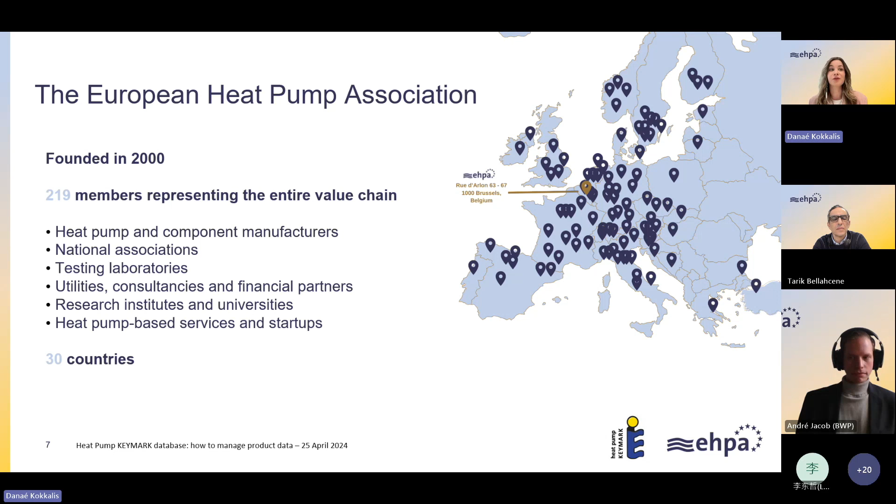We have manufacturers for heat pumps, but also components, national associations, testing laboratories, utilities, consultancies, research institutes and universities, and heat pump-based services and startups. So all of these together are spread across 30 countries in Europe. We have a very diverse association, and we also have a few departments.

As an association, our mission is to help the heat pump sector develop to its full potential and make heat pump technology the number one heating and cooling technology in Europe. The policy department is helping a lot with that because they are the intermediate between the people in the sector who express their needs, and then the policy department pushes that and communicates it to the institutions.

Here is the Heat Pump KEYMARK. So this is where we stand. We are managing the Secretariat as EHPA, but the scheme itself is owned by CEN and CENELEC, which is the European Committee for Standardization.

And as a Secretariat, we manage meetings. We participate in a lot of trade shows, in-person events, and also webinars like the one you are attending right now. And we also do some promotion both online and in real life. We also have some European funded projects that we're managing.

These are only some of them. We have a lot more. And we also have other departments that are not depicted here, but are still important, like the communications department and the events and membership one. So if you would like to know more about what EHPA does, you can go to our website, ehpa.org, to learn more.

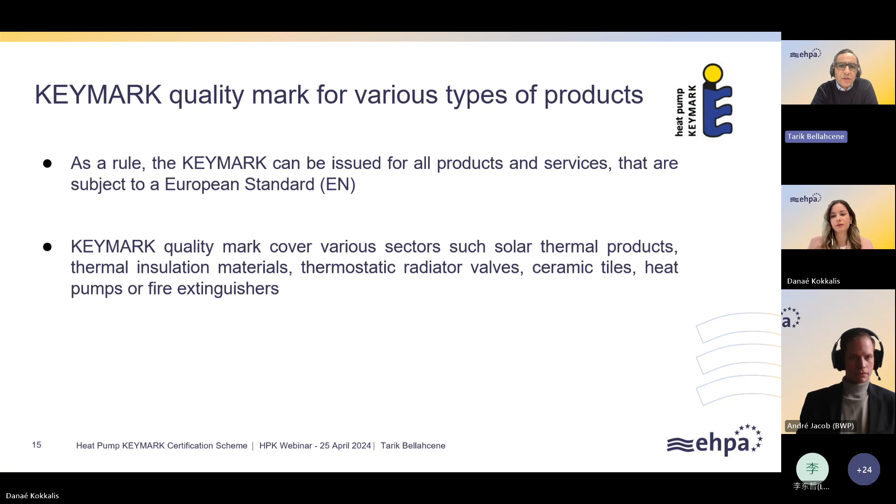You can see here the main, let's say, alive KEYMARK certifications. Thermal insulation is one of the most advanced and mature, with almost 2,500 certificates, followed now closer and closer by the Heat Pump KEYMARK. Today, Heat Pump KEYMARK certificates represent 37% of the total KEYMARK certificates issued in total. Then you have solar thermal, thermostatic radiators, and thermal insulation. So we see that KEYMARK heat pump is quite solid and still growing, one of the most respected KEYMARK certifications. It's a good sign, it's positive.

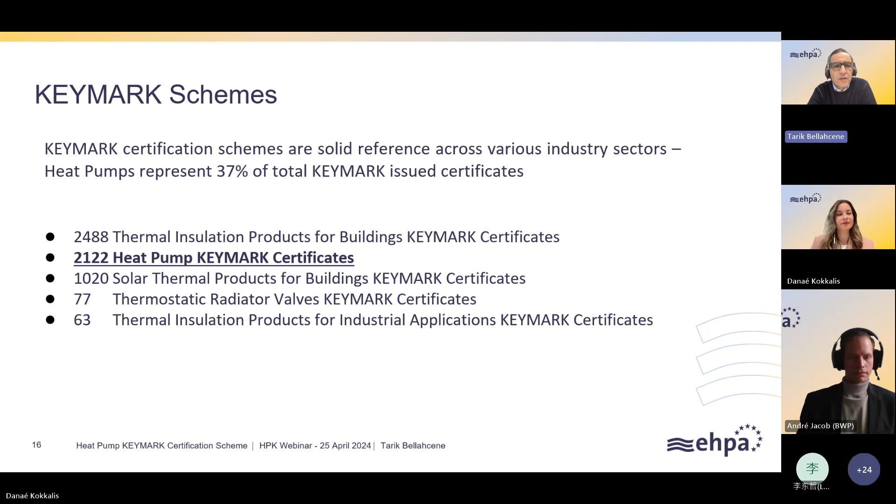Now, if we focus - since there are different KEYMARK schemes - as the European Heat Pump Association, our focus is on heat pumps, and the scope covers different types of electrical driven heat pumps. This is a short summary of the scope: space heating and cooling heat pumps, domestic hot water, and combination heater heat pumps. The technologies we cover in the KEYMARK certification are air to water, brine to water, and air to air. You have more details in the Heat Pump KEYMARK rules version 14, which is publicly available online.

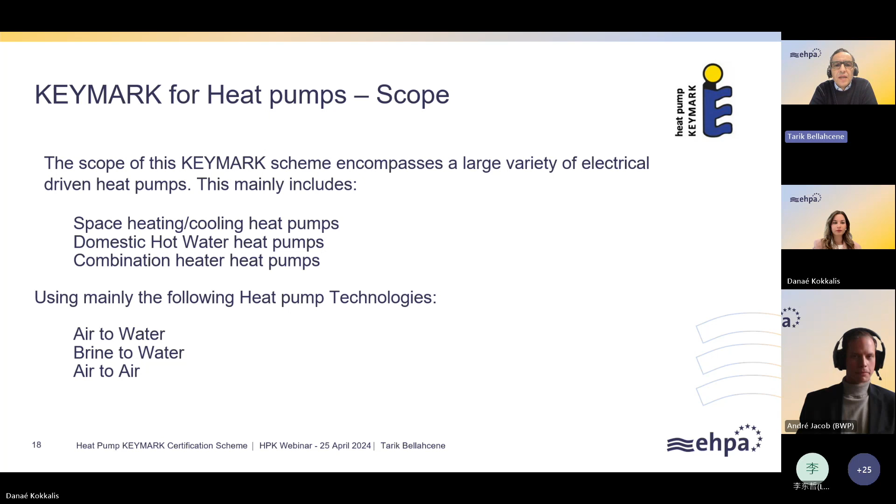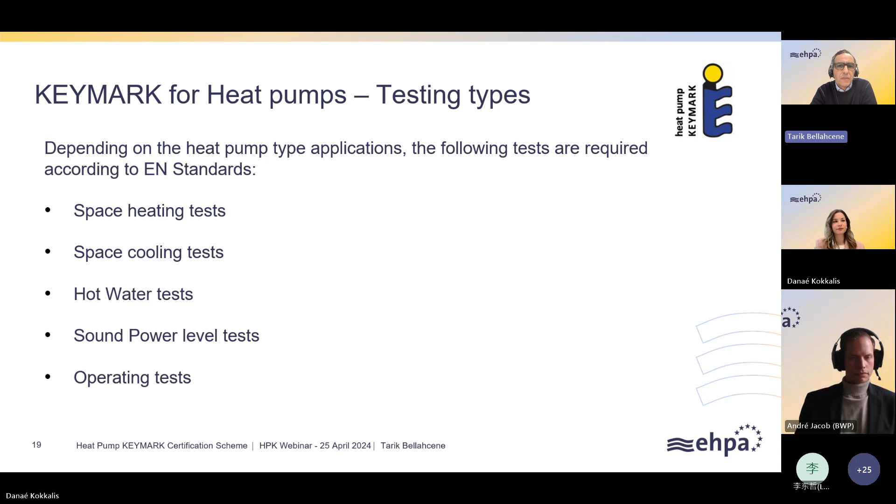Now, again very briefly, to give an idea of what we cover in terms of testing: it's important to understand that the Heat Pump KEYMARK is a certification that challenges a device from the performance point of view, not the safety point of view. So we challenge the product under different conditions: the space heating or space cooling test, the hot water test when there is a hot water option, and we look at sound power and some operating tests. So it's really about the performance, the functioning of the heat pump, not necessarily the safety, electrical, or other safety-related checks. This is not KEYMARK - that can be in a CE context or other certification schemes. Here, KEYMARK is about the performance of the equipment.

So to do this test that I mentioned, but summarized as much as I can, we need to refer to European standards, and these are the main European standards. I'm sure you recognize them, probably better than me, that we refer to in the scheme to do the testing. These standards describe the test setup, test requirements, and all details related to the testing. You can see they are all European tests and standards.

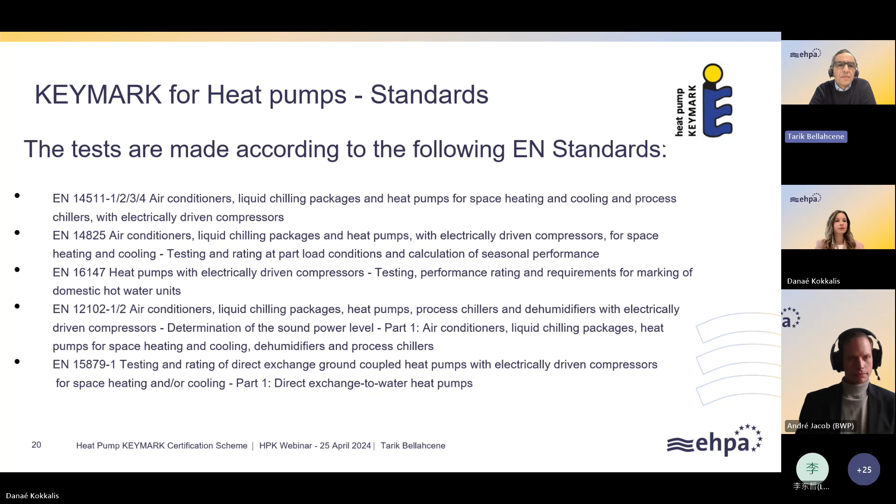Now we looked at the standards, we looked at what we test. We know there's a third-party certification body, but then who is managing, who is making this scheme work and stay alive? So we have a clear and open structure where you have the heat pump scheme group. The scheme group mainly consists of the certificate holders, the laboratories, the certification body, the inspectors, and the EHPA.

You have a steering committee who is really developing the rules, looking at maintaining quality documents to make the KEYMARK scheme robust and to sustain the quality of the scheme.

So the steering committee has a lot of work in terms of technical aspects, but also the quality aspect of the scheme. The steering committee presents to the scheme group all the modifications, the rules, or the development of the scheme. So any development made by the steering committee still needs the approval of the scheme group to be adopted as a rule, or any modification or development.

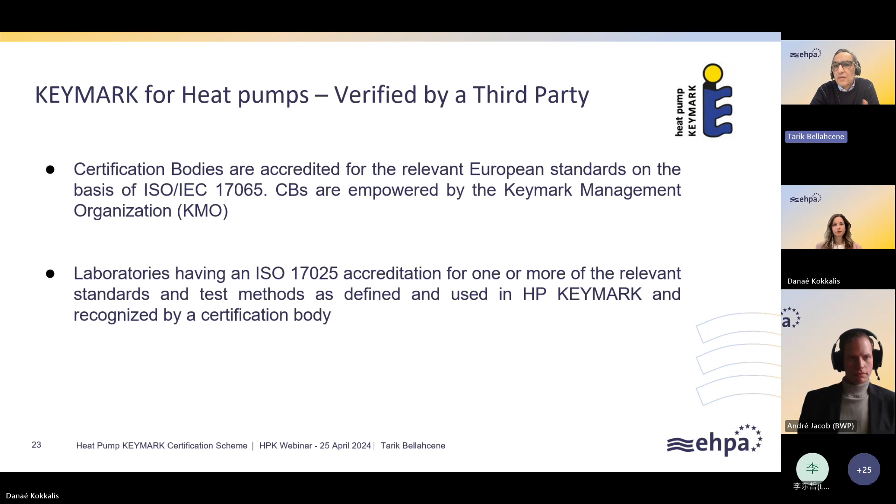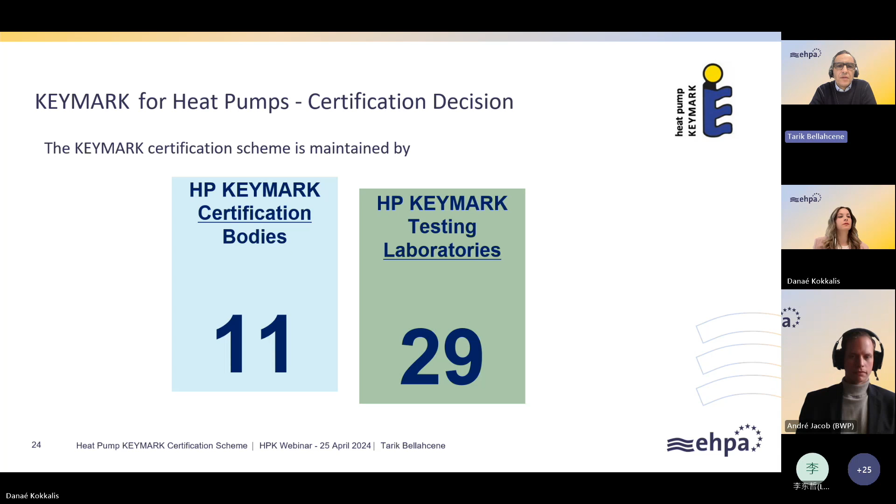So today I said that KEYMARK is empowering certification bodies. We have 11 of them that are delivering the certification, and they take what we call the final certification decision. These 11 certification bodies recognized 29 laboratories across the globe. You can see them in the slides showing the certification bodies and the laboratories. You will receive this slide, so if you want to look in detail who is who, you can have a look at these slides.

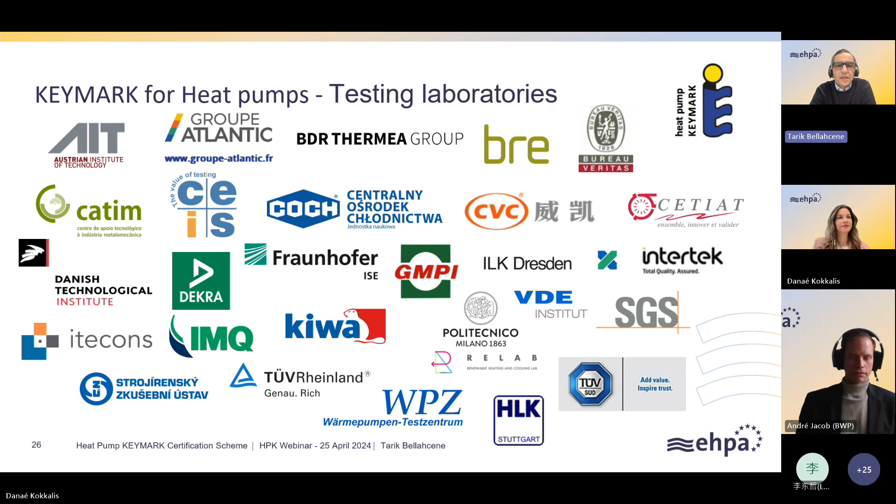As a result of this setup, this organization, this scheme, all these efforts from the CBs, certification bodies, and the laboratories, we have a fast growth in terms of development of the scheme. Today we have 141 certificate holders holding 2,122 certificates, and this covers more than 8,000 certified models, which is huge, which is very big.

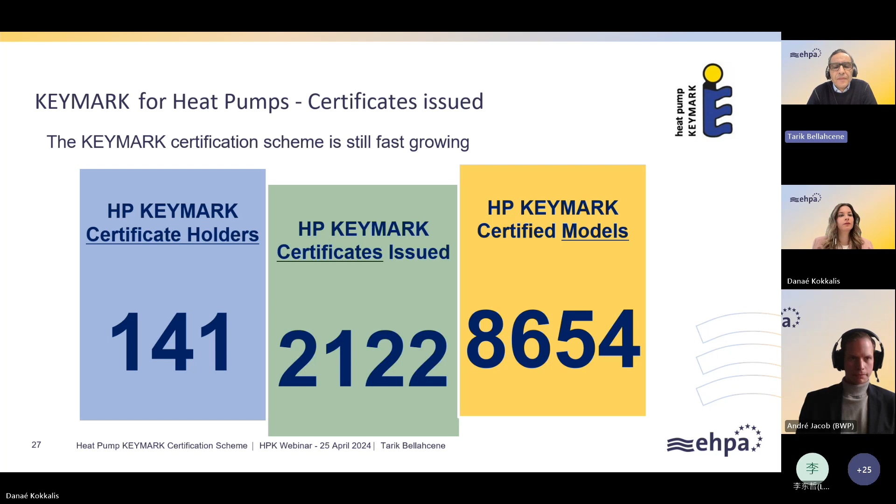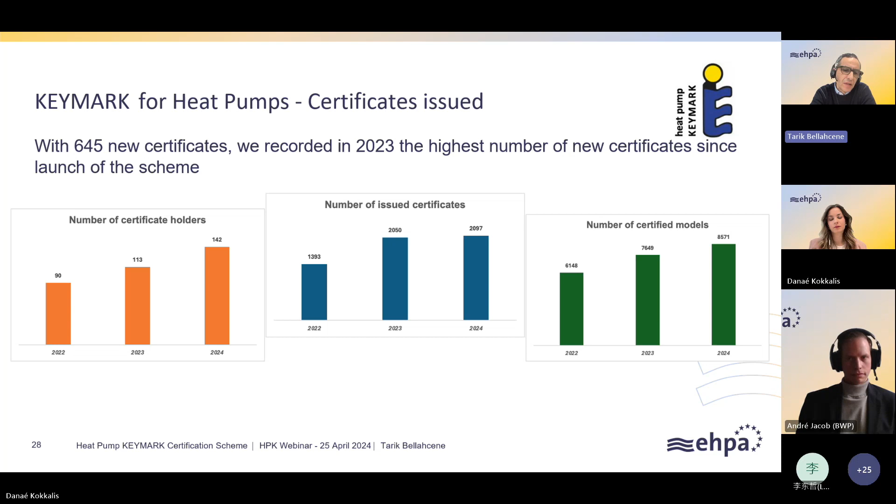You will see in my next slide how this is evolving year after year. Just comparing 2022 and 2023, you see that the number of certified models or certificates is increasing very fast from one year to another. Just to give you a number, in 2023 alone we had 645 new certificates, which is extremely high. Usually the annual average is between 150 and 200, and here we're talking about more than 600. So the interest in the Heat Pump KEYMARK doesn't need to be demonstrated, it's obvious looking at these numbers. The main reason is the third-party certification, the European certification.

Now we can talk about the certification process. It's a classical one, where we have an application step. The manufacturer or distributor will contact one of the certification bodies of their choice, close to their country, or one they're used to working with, or one implemented within their country of activities. From there we have a clear review with the manufacturer. Together they work on the family of products to be certified, to understand the manufacturer's needs, and to come up with a family of products and a testing plan. Then the manufacturer can look at a laboratory that is designated, empowered, and recognized by the certification body.

Then we can start looking at the auditing, the inspection part, and the sample collections, and start the testing as well. All this can start at the same time, and the certification body will collect the inspection report and the test reports, do a review of these two reports, and come to a certification decision by issuing a certification for the product. This is how it works.

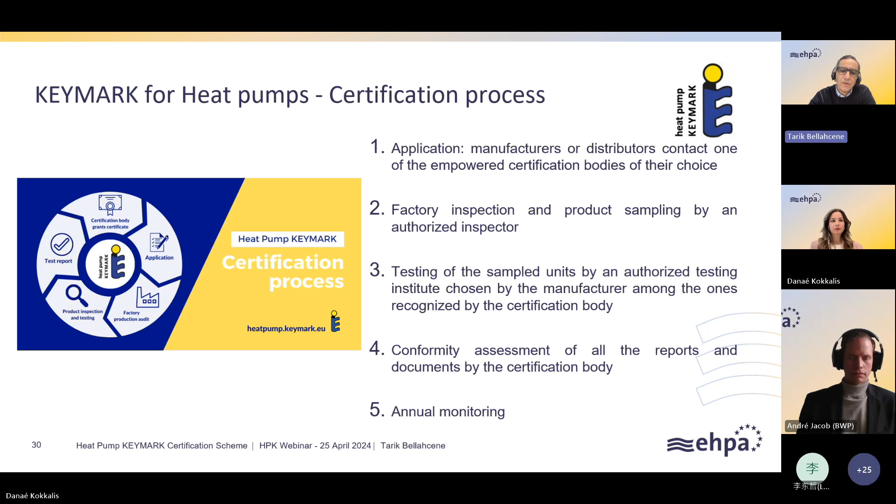Yeah, I will. The database - Andre will speak about it in detail. Just to say that there is a database used by the manufacturer, the certification body, and there is public access to some part of it that is interesting for the public and a consumer, an installer, or even a regulator. So this is something that will be covered today. That is the main topic of today, by the way.

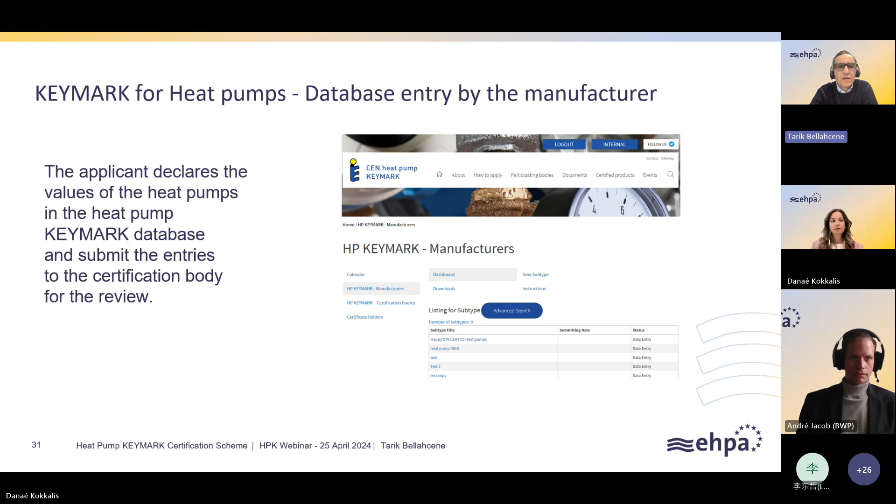I just want to talk about recognition because we keep on talking about recognition, and I wanted to put some slides because just to say that we are not trying to avoid any comment, any discussion, any question about recognition. I have 2 slides about recognition.

These are for sure. We know that if you have Heat Pump KEYMARK certification, you can de facto immediately, without any additional testing or additional paperwork, register your product for the UK, so the MCS database. So this is something that is obvious, but again, it is important. You need to go through your certification body that will contact the Heat Pump KEYMARK Secretariat - it's me - and we can upload the specific format to populate the MCS database, and then your products are there listed for the UK market.

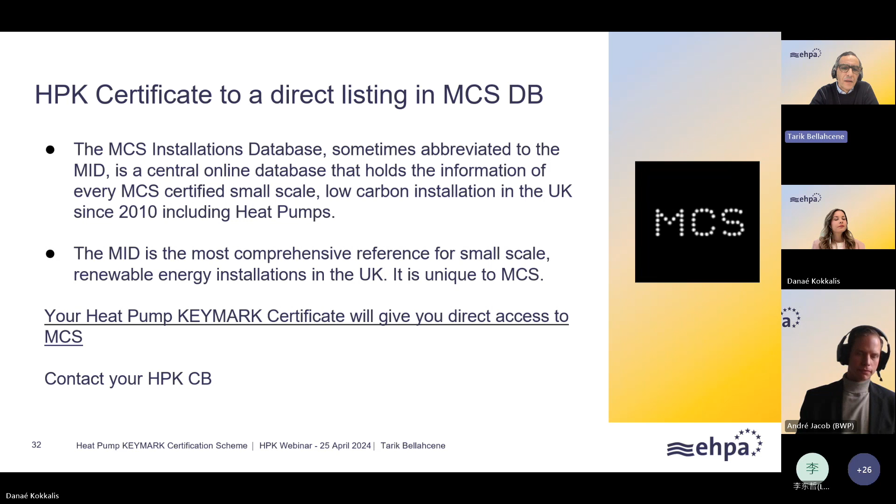Ready to be referred to for any subsidies or any other plan. The second one is the quality label. So the quality label also, there is a lot of discussions, and you can't imagine all what we are discussing to keep aligned the quality label with the KEYMARK.

These discussions are still ongoing, but this is clear that with your Heat Pump KEYMARK certificate and the test report, if there is any test report, you can have access to the quality label, and you need to contact, it's by country. So if you want to go to the Austrian market, you need to go to the quality label national commission in Austria and apply, and then and so on and so on. But you can definitely refer to a Heat Pump KEYMARK certificate.

Again, although you heard maybe something different because of the misalignment that we had with the quality label, but now we are back on track, hopefully, and we are clarifying some valid points made by the national commissions about the test reports, about the format, about a lot of things. But the concept is clearly confirmed by both parts, that they recognize the scheme, the way we are organizing the subtypes, the way we are testing, the way we are managing the Heat Pump KEYMARK scheme.

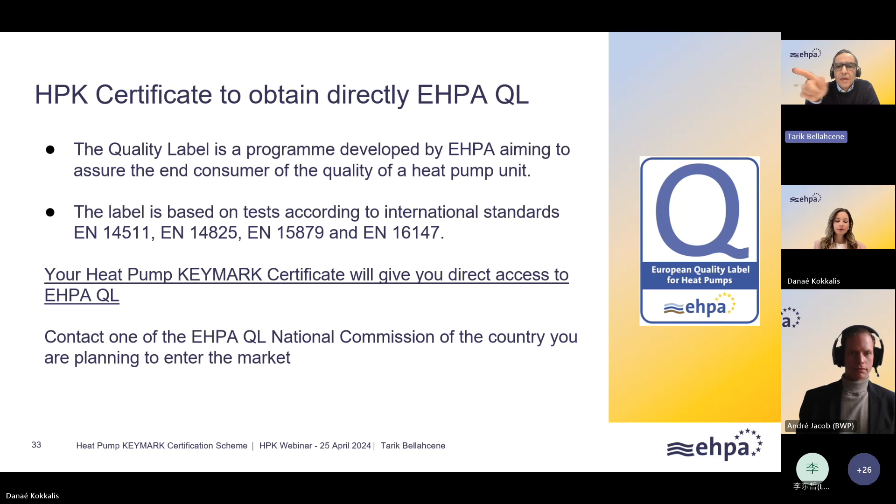So we have some points that needed clarification and discussions, and some are still discussed, but you should not have any problem transiting from KEYMARK to obtain the quality label.

So yeah, for this, in the past, we had a nice map here of Europe, but this is very complicated to show a map, because from a country to another one, the situation is very, very different, not complex, but different. So you have different possibilities depending on which country you are.

If the country is regulated, and they can refer to heat pump KEYMARK, like France - they are regulated, they refer to heat pump KEYMARK, so you can use your heat pump KEYMARK certification to follow the process and get into the French market.

This is an example. But there are some countries, let's take Italy or Spain, where there is no specific regulation. There is nothing that is mandatory or enforced within the country. So what we can say is that KEYMARK is not recognized. It's not that it is not recognized - it is not needed today.

But if there is a scheme, there is an example in Czech Republic where they are working on subsidy schemes - they start to look at KEYMARK, because that may be a reference to their subsidy scheme. But if you go to, again, Italy and Spain, where maybe there is no specific plan to have a subsidy scheme, and there is no plan to enforce a regulation, or it is coming, we don't know, then the KEYMARK is optional. As simple as that.

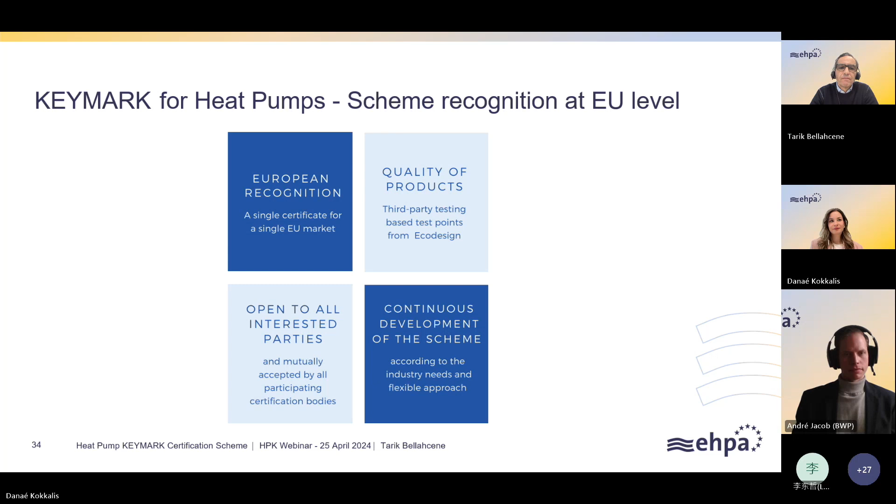I think the next slides are about the database. This is in the context of giving public access to information. There is a dedicated website where you can find all the information, and André will touch part of this as well in his explanations. Then you have access to the listings of the certified companies. I guess you are all familiar with this.

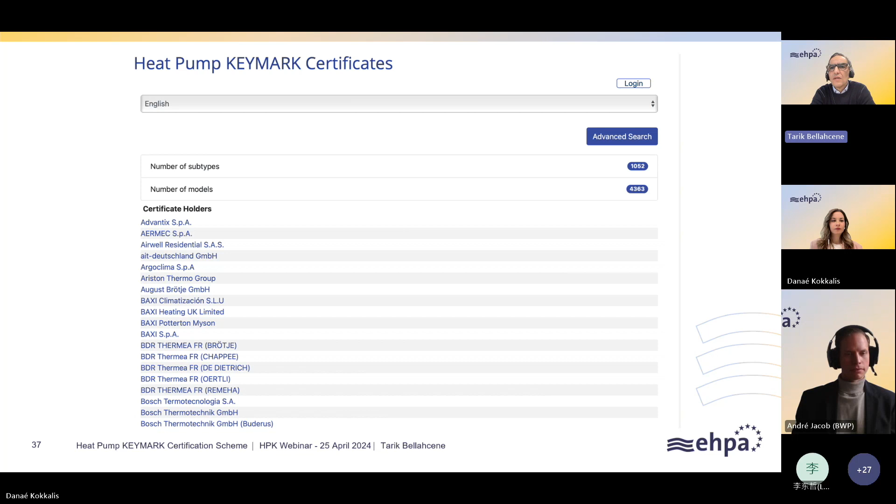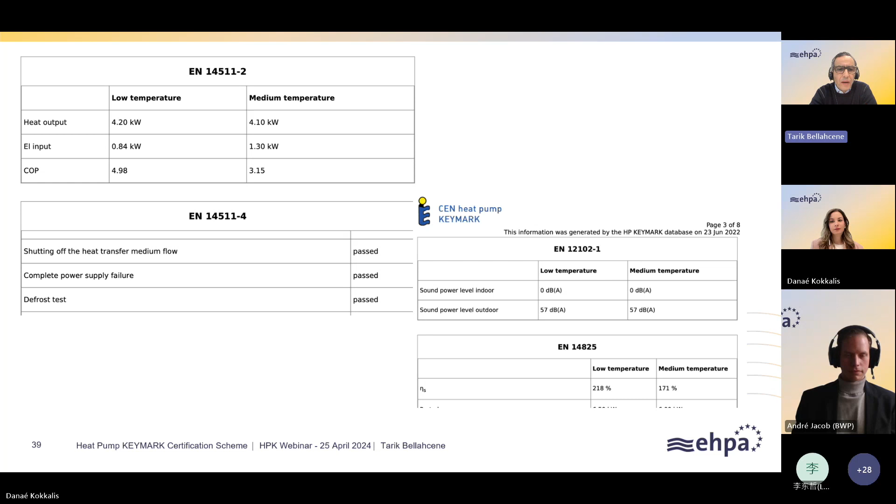And then you can click on the company, and then you can start to go more in depth to understand what is certified according to which standard, what are the technical parameters of the equipment, and what are the test results that are summarized. I think now we have multilingual access to this database, and at least we are working on this. But I know that André and Danae did a very good job on giving access to the public, but also in other languages than English.

And again, the transparency of the scheme. So we invite all the certificate holders, laboratories, inspectors, certification bodies to participate, and this is definitely a real invitation to support this certification scheme. Thank you for listening to me. Maybe you will have questions later, or yeah, okay, good.

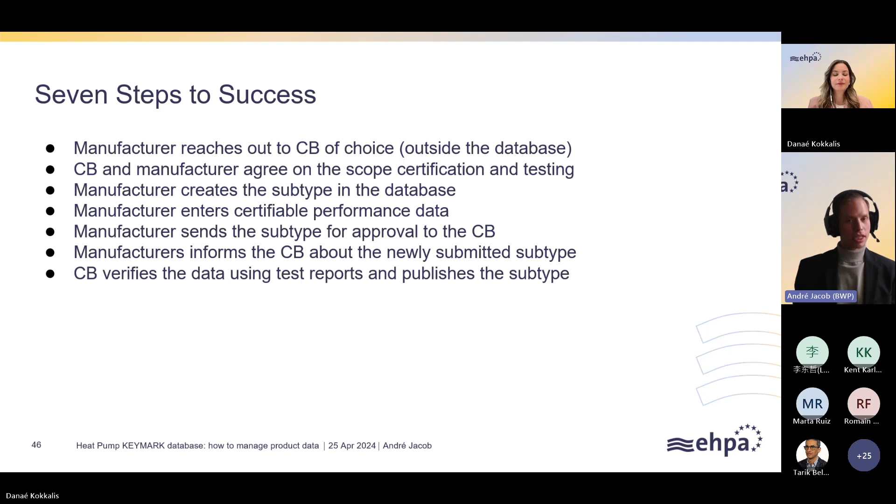And now we will cover all of these steps in detail to see what is to be done within the database. So this is how to get the engine running, as different groups. As a manufacturer, you would reach out to an empowered certification body to say that you're interested in the scheme, as said before.

The Heat Pump KEYMARK Secretariat will be notified about your interest in the scheme and add the manufacturer's company to the database, or you might also reach out to the Secretariat directly, but it is advised to go the route through the certification body.

Then a user account will be created for you, and you will receive a request to reset your password, which is needed prior to your first login.

As a certification body, you would need to send an application form to the KMO, as said before, as the organization supervising all KEYMARK schemes. And as a testing laboratory, you would establish contact to one of the certification bodies, or even more if you want to, and you should pay attention to the requirements that are laid out in Annex H of the KEYMARK scheme rules.

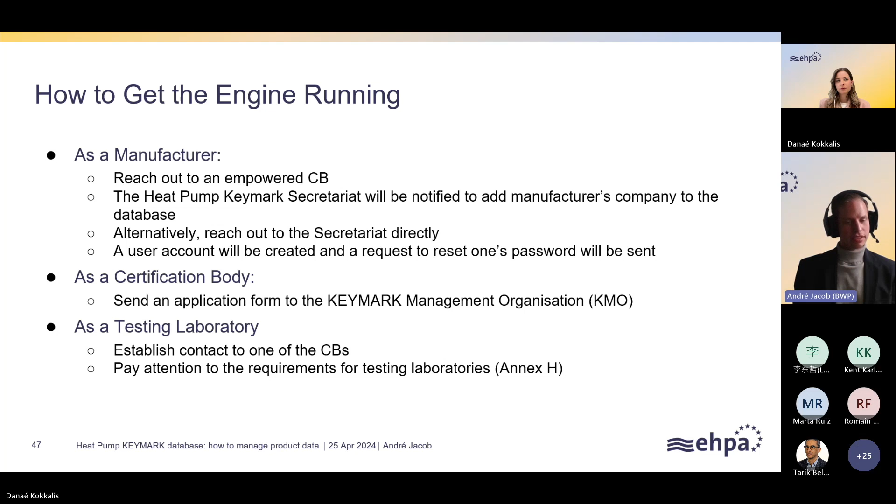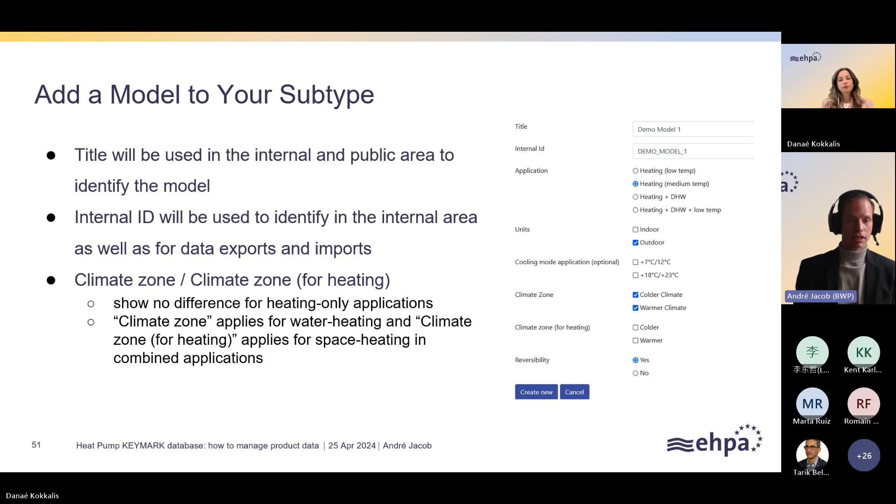For medium temperature heat pumps heating only, there would be data for low temperature and medium temperature, for example for the standards 14511 and 14825. If you have a low temperature heat pump, only low temperature data fields would be added to this dynamic data sheet. And then to fill out the data and get rid of the NAs, you have two methods: manual input and data import, which we will both cover shortly.

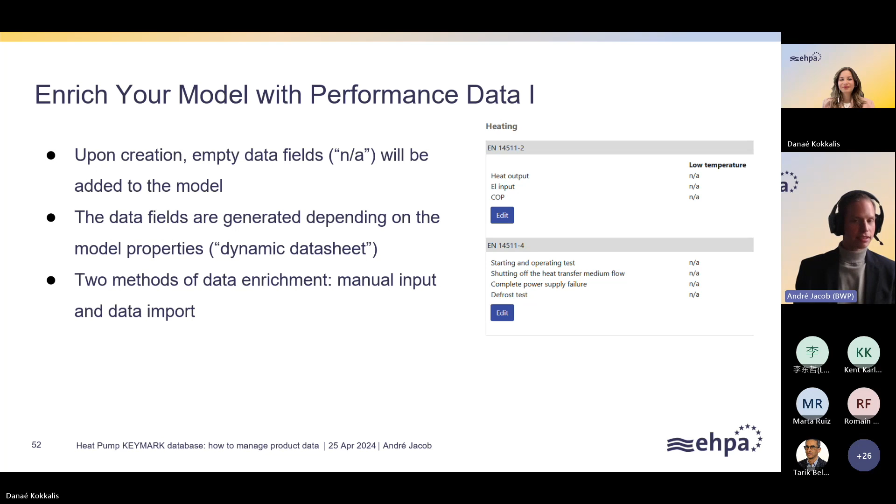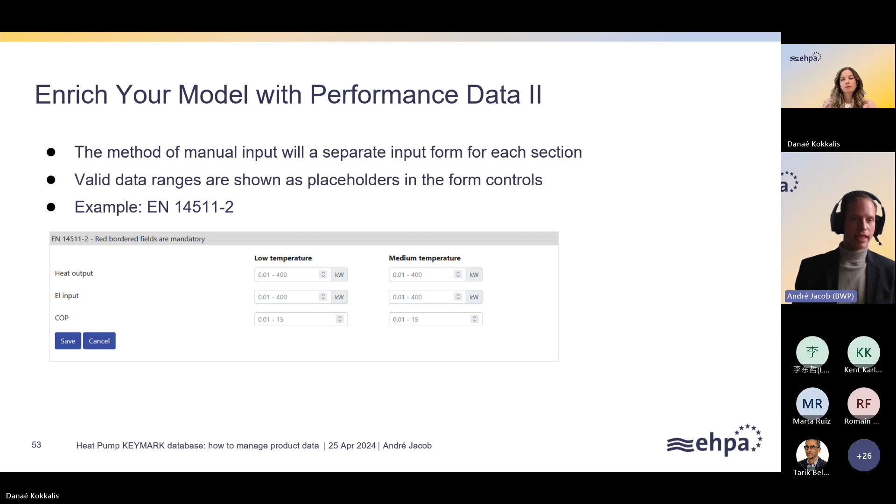Next slide please. So this is the manual input of data. As you can see, there is the valid data range shown in the input fields, as well as the unit next to it. And then there are the required fields highlighted in red. This should be true on each and every field in the database that is required. This is here the example for 14511 part 2 and for medium temperature heat pumps. So you could enter this data manually and click on save, and then there wouldn't be these NAs anymore, but the data you've just entered.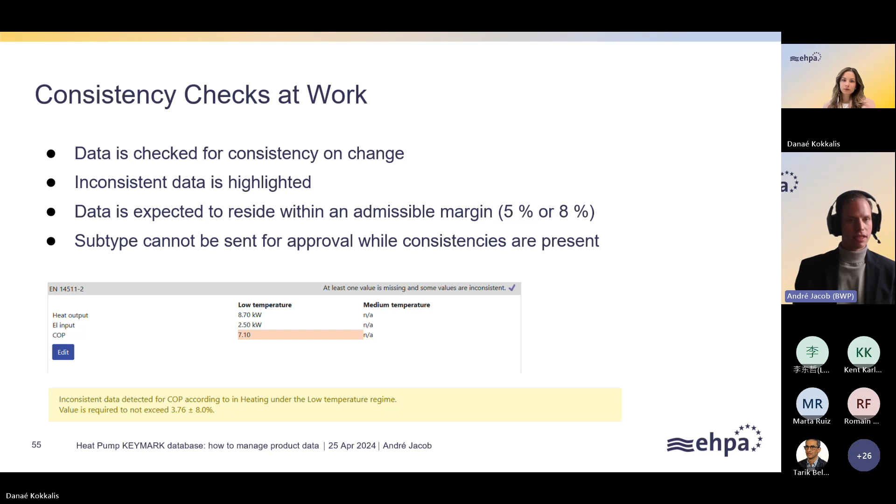Next slide please. And this is what the certification body sees on their side. They have an overview similar to the manufacturer's, and also a detailed subtype view with all the data in short. They would change the subtype's status to either data entry, to send it back to the manufacturer - for example, if there is data that might be consistent all along the subtype, because otherwise you wouldn't be able to submit it in the first place, but it might not correspond to the test reports also sent over. Then they would change the subtype back to data entry, so you as a manufacturer would have the chance to change data again.

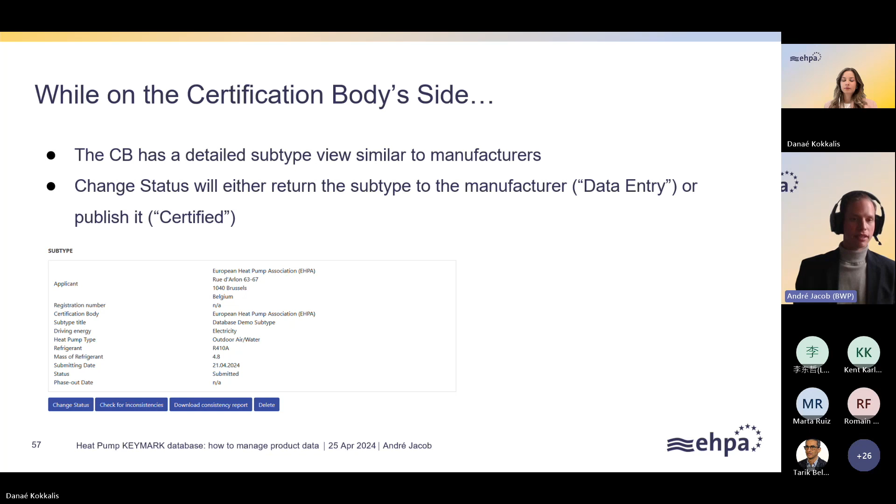Or if all the data is fine and corresponds with the test reports, the certification body would change its status to certified, and the subtype would be visible in the public area of the database. Next slide, please.

Also, the certification body would change or add data to the subtype that's only known to them, especially the registration number, as well as a PDF of their certificate prior to publication, so that interested parties can search for the registration number and download the PDF file for further use if needed. Also to cross-check the PDF they might have received a different way, for example via email from another party using this KEYMARK certification, to check if it corresponds to the PDF file that is in the database.

Next slide, please. And this should be everything from my side. As I said before, we will go through all these steps after the break, and then we will see how this works in action.

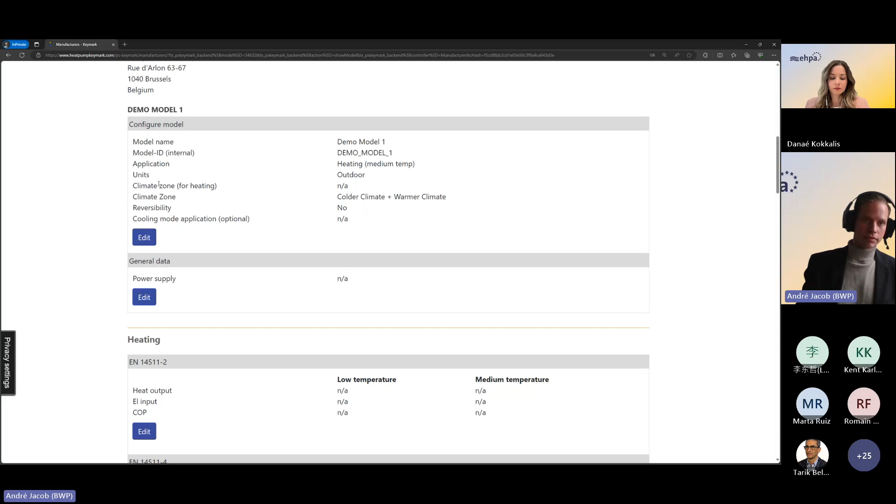So then we would create the new model. And this is the detail view. You can see the general data on the subtype, on the model - this is basically all the information you've added before, and then it'd be broken down by the application.

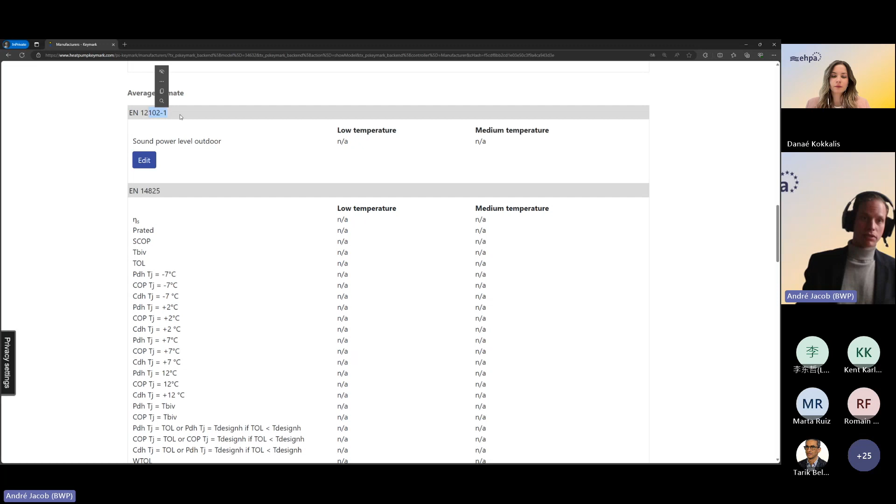So this is heating, then you have the standard, and then the information, performance data related to that standard. Then this goes on and on. Then you have the average climate, also heating. This is then the sound data, or sound power level according to eco design.

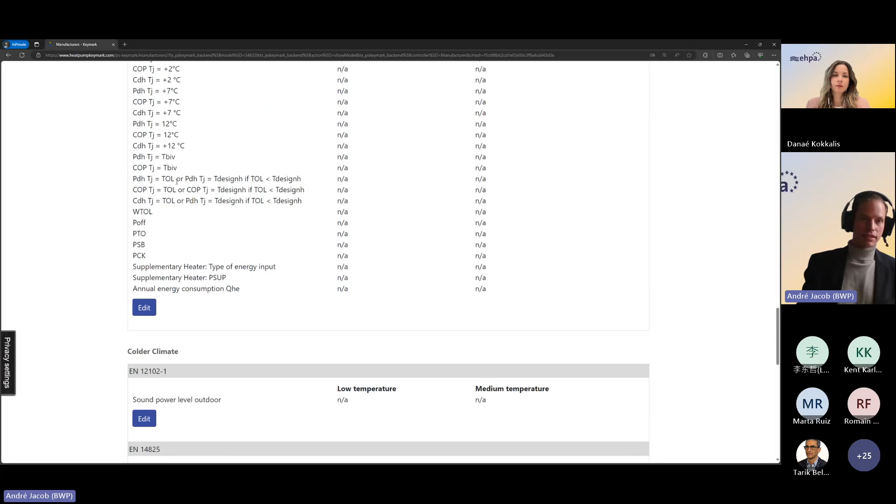Then this is 14825 data all along the way, and then you'd see the next climate zone, because you click that you'd cover warmer climate and colder climate, and that is it.

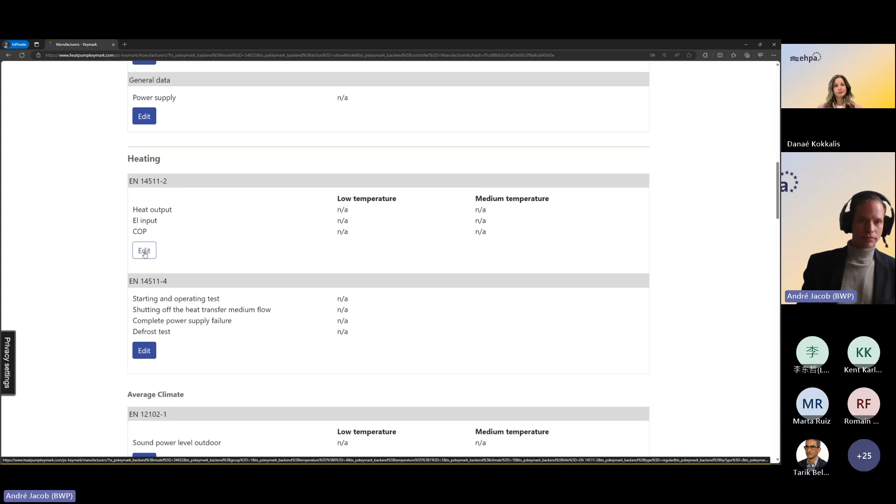So, at this point already, I'd like to break a little bit apart from the slides where it showed the inconsistencies later, and do it now by adding data here.

So this is my heat output. This is my electrical input. We have a simple example here. And then as well, we have, let's say 10, but we say that the COP would be 6.

So that's definitely wrong. We save the information, and this is the warning that you'd receive when adding data that is not correct or inconsistent with other data found in the model. This is also highlighted, and you will receive a message here. There are no NAs in this section, but there is an inconsistency.

So in order to sort it out, I click on edit. I say this is 5 rather than 6, save, and now this is all good.

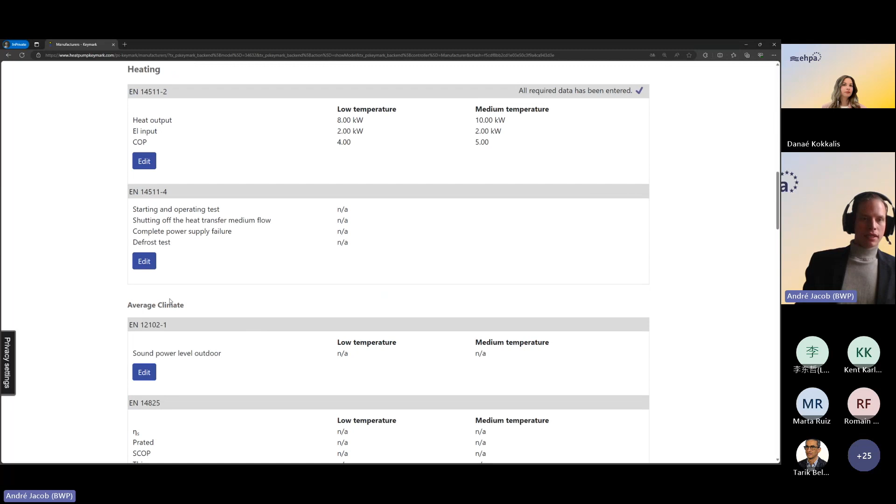I've now done this already and entered the data. So we will not go through the pain of doing this all together, which is also a little bit time consuming doing it for the first time.

This is why I go to the bottom of this detail view on the model, click on back to get back to the subtype. Here I click on import model, then I will select the file and click on import CSV.

This has been all prepared before. Then this would go through. I get a message of success down here. Click on cancel, go back to the subtype.

And then I open up the demo model 1 again. And now there's data everywhere in the model.

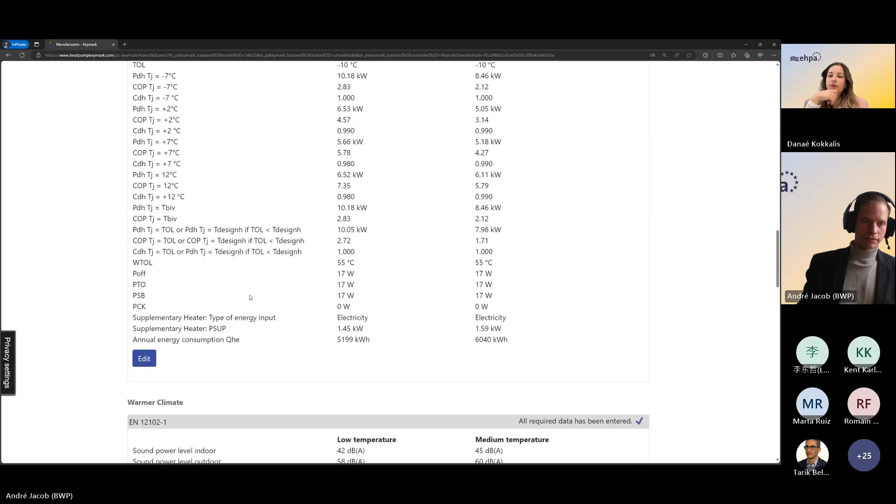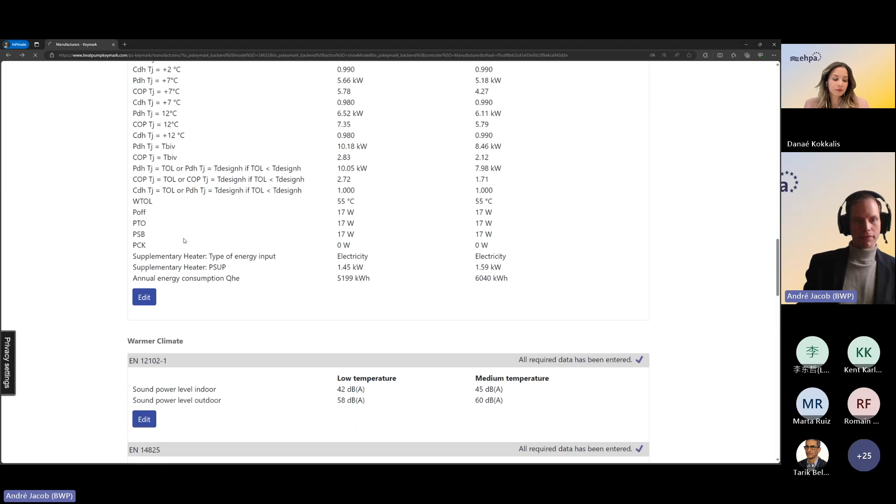Normally, if you enter data for the first time, you'd likely need to enter all the data manually, but then you would export the data and upload it later for another model. And I will show that now.

I've created another CSV file, which is basically the same. It just has a different name.

For this, without adding a model first, I click on import. Then I will select another CSV file, conveniently named 2 in the end. Click on import.

See the message of success down below. Click on cancel to get back to the subtype detail view.

Then I will go down to the models, and now I have another model here which is differently named, and it also has all the data added to it. So there's also the possibility to generate these CSV files using an internal database within your own software, and then import this data directly into the database without any manual creation and enrichment of data.

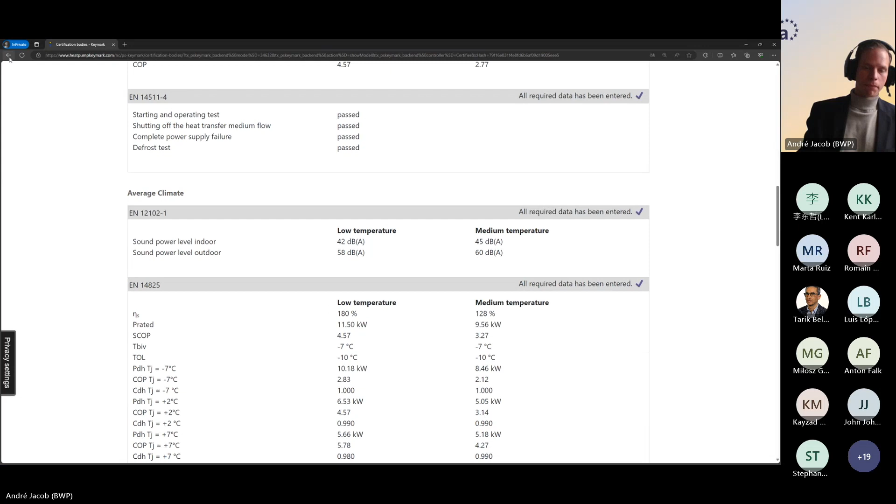They would verify this data. Then they would add a registration number. This registration number is subject to the certification body's policy, so there's no overall scheme of registration numbers. Then they could also upload the PDF file as shown before.

And if everything's good with this subtype, they would change the status down below to certified, or if not, I can do this for a second, they would change it to data entry again, click on submit.

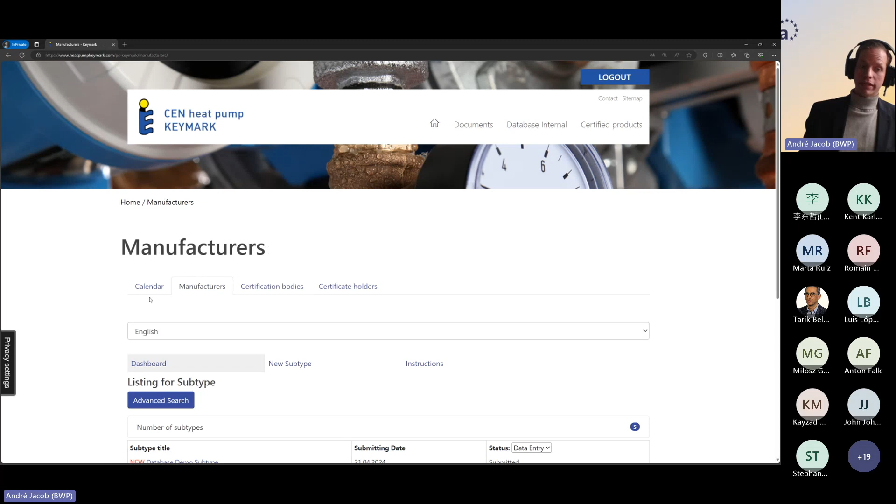Now we go back to the manufacturer, and as you can see, there is a submitting date, but it's also data entry. And as you can see down here, you as a manufacturer are capable of changing data again. But we think we did it all right, so we will send it for approval again.

Open the subtype, change the status from submitted to certified. We would enter, for the demo of this purpose, a random data, click on submit. The data has been saved.

Over here, we will take a look into the public database. And as you can see down here, right away, this data is public with our demo subtype to be seen by the world.

But to not change anything that's important, we will quickly change it back to submitted, to redact it or withdraw it from the database. That is it for the demo. These are all the steps that are needed to get your performance data listed with the public KEYMARK database, the Heat Pump KEYMARK database.

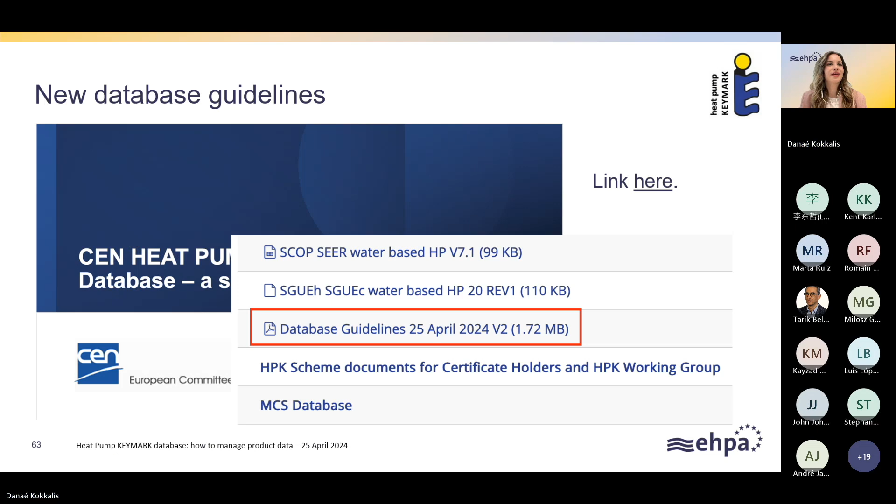In the past, we have had manufacturers speak about their experience with the Heat Pump KEYMARK certification. We have asked certification bodies and test laboratories to also explain how they work and what their role is in detail. This time was a bit more specific. Thank you again to André for the presentation and the demo and answering all the questions. But if there is anything else, whether it's a broader topic or something specific that you would like to learn more about, feel free to let us know.